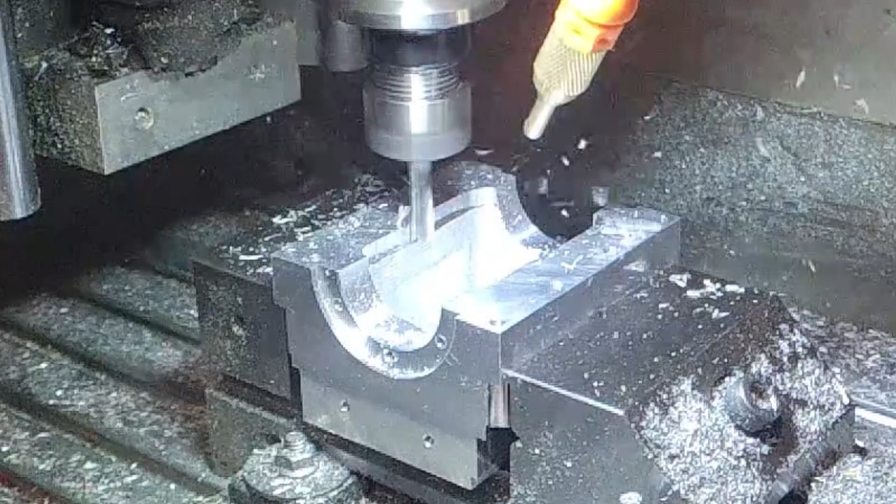Today we're going to work on the sump for our 30cc Wallaby engine. We're going to be looking at the Fusion360 files to machine the inside, the sides, and the bottom. We'll be reviewing topics we've touched on before, including loading an STL file that's representative of the rough stock that we've pre-machined on our mill.

We'll be modifying the CAD model to create keep-outs, so we don't machine areas that have been previously machined elsewhere, like the crankshaft bores we machined on our lathe. And finally, we'll delve into some of the operations, looking at tool feeds and speeds, depths of cut, tool loads, and things like that.

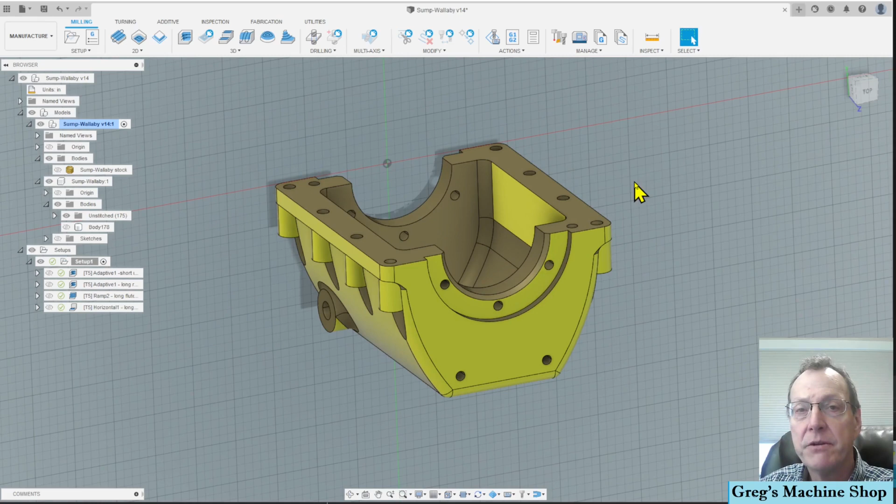So we created an IGES file out of our CAD program and imported it into Fusion360. That's this model here. Now, if you watched the last video on manual machining, we roughed out most of this material from the inside of the sump. This is an optional step, but something I like to do because I can remove the material much quicker on the manual mill with a drill bit than I can on the CNC machine. So let's take a look at that real quick.

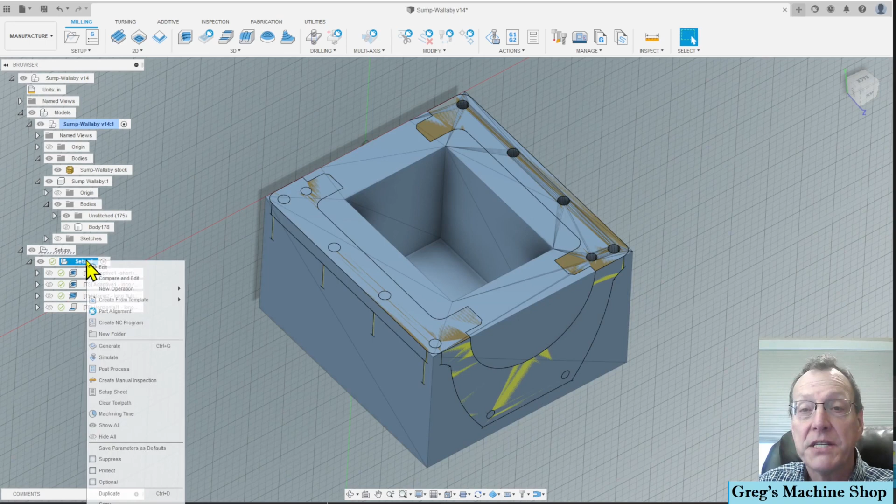Then we created a simple STL model that reflects the geometry created by roughing out that material on the manual mill. Right here. This was an STL file that was imported, and then down in our setup, you can see this area has been removed. In our setup, right click, hit edit, stock, we say from solid, we click the mesh, and we select this STL file. We've covered importing stock before in a video entitled Fusion360 using stock.

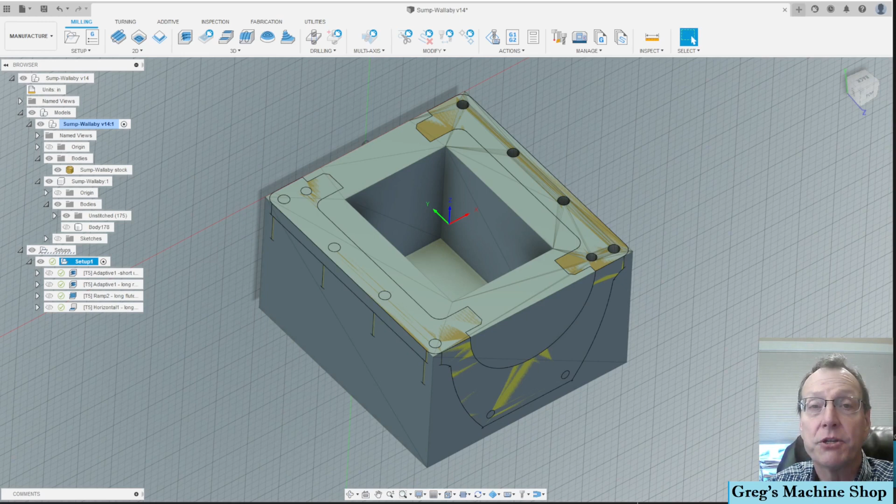Another thing I'd like to cover is how to mask part of the model that we don't want to machine. In our case, we've got these bores that were created on the lathe and the precision surfaces. We don't want the CNC machine to be machining in this area at all. We simply want to machine down and machine this cavity.

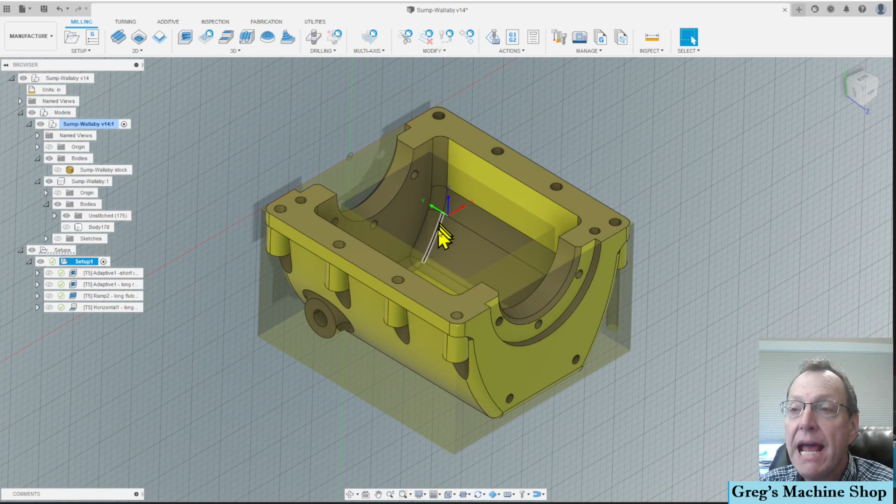One way to do this is to select areas within the model that we'd like to have machined. And we could do that. We could click all of these little areas, but there's no simple little box that we could click that would allow us to select just the area that we want machined. A much simpler method is simply masking those out in the model itself. We've explored different ways of doing that. The simplest, I think, is to just pop back into the design environment and create a sketch.

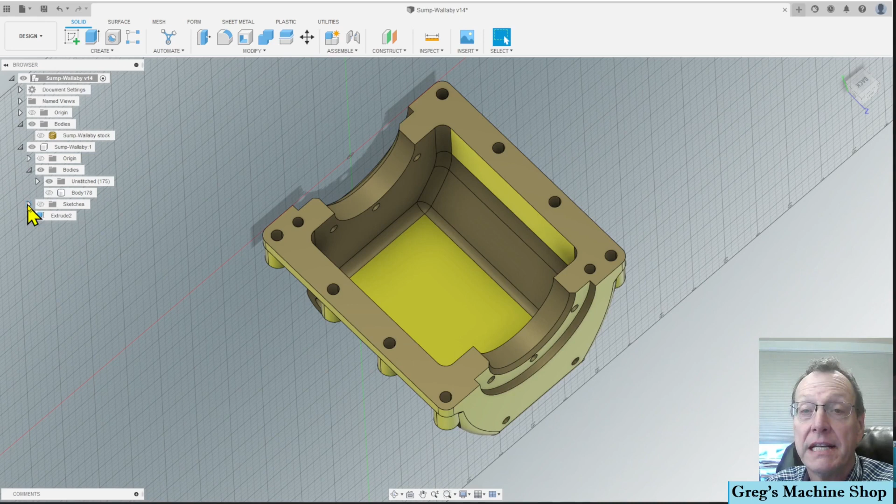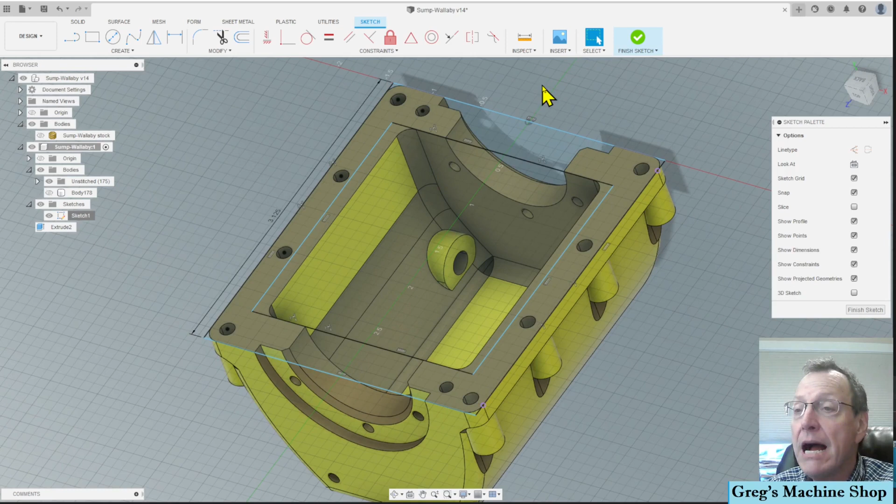Here's a sketch that I've created. Let's just pop in and edit this. It's simply two rectangles, one within the other, and they exclude the ends of the sump, which will allow me to machine just this area in the middle here.

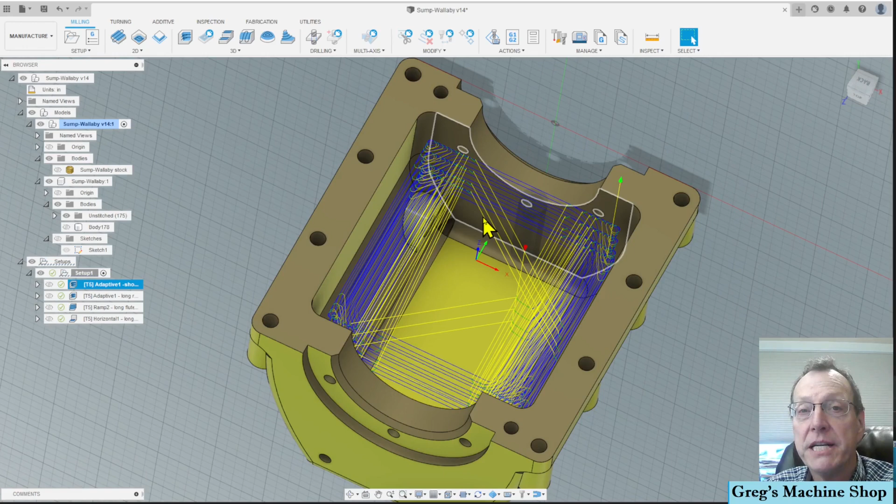Going back into the manufacturing environment, looking at our first machining operation, you can see these blue lines here represent the tool path. We've successfully masked out the ends of the sump, so that area is not machined. And then by using our STL stock, we're not machining out the middle, which has already been machined earlier on the manual mill.

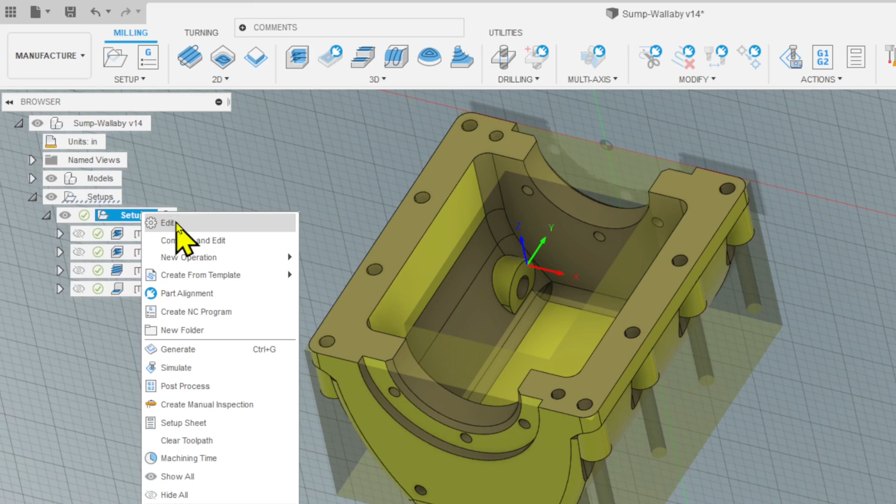Before we look at the operations, let's review the origin point. I've got mine set right in the middle of the part. This is easy for me to touch off on my machine by touching off the four sides and then zeroing to the center. The way we set our origin point is we right-click on Setup, click Edit. The first tab is Setup.

I've selected the Z and X axis. I'll come over the model for Z and I'll click a vertical edge. And then for the X axis, I'll click an edge that I want in the direction of my X axis. And then for box stock, I'll click the point that it presents to me right smack in the middle of the part.

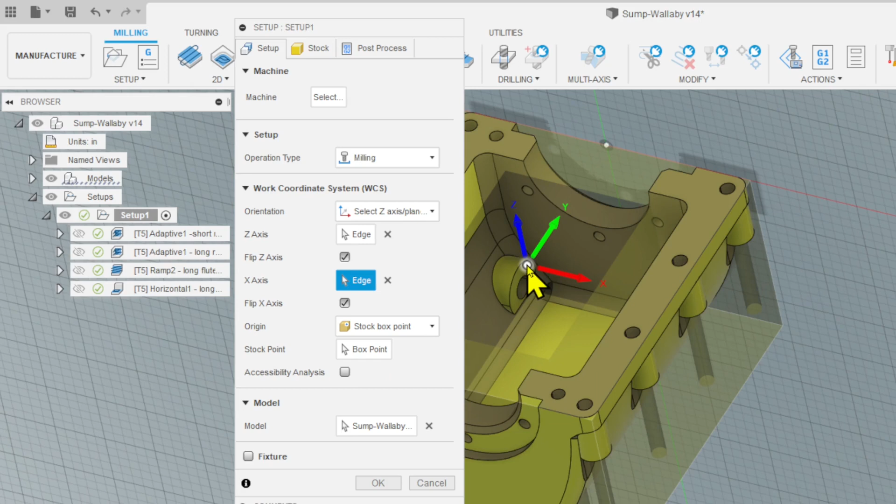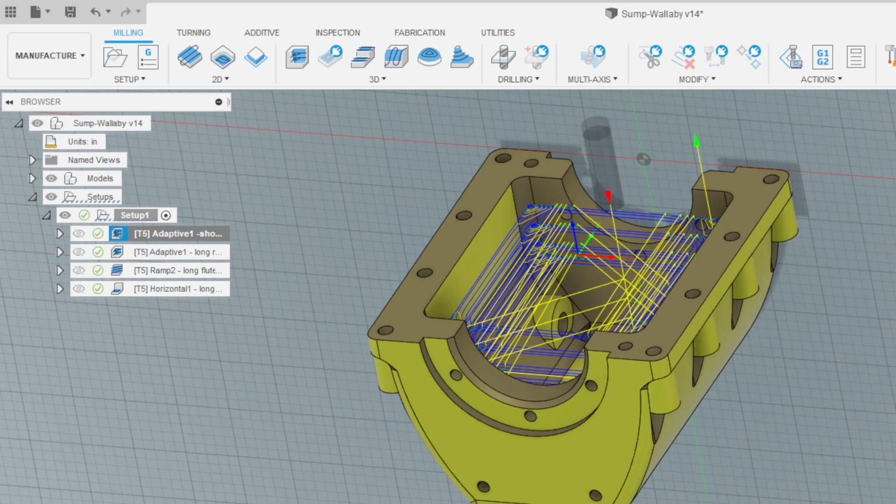So I've decided to use 4 different operations to machine the inside of my sump. My choices depend on the capability of my machine and the tools that I have on hand. The first 2 operations are done with a 1/4 inch flat end mill that only has a 3/4 of an inch flute. The first operation, right-clicking on it, opening up Edit, looking at the first tab, which is the tool, I'm running my spindle speed 8,000 RPM, and I'm running the cut feed rate at 12 inches a minute.

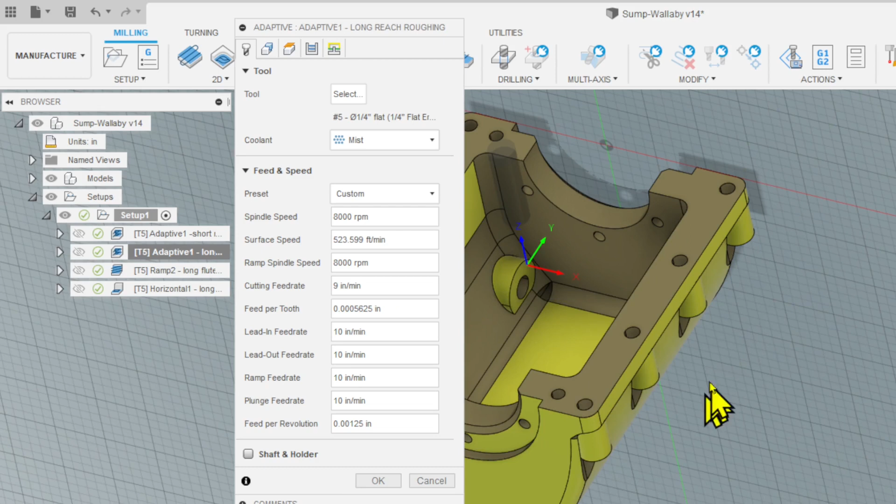However, in the second operation, I'm also running at 8,000 RPM, but I've slowed the cutting feed rate down to 9 inches per minute. This is because on the first operation, I have a 1-inch stick out on this end mill. On the second operation, I have to reach down into the pocket, so I go to a 1.5-inch stick out, and I slow the machining speed down.

I want to make it clear that these speeds and feeds that I've been using on my machine, the spindle speed and the feed rate of my machine, have been derived over a period of time of experimentation and understanding my machine. There's many factors that go into what will work best for you. So if you use any of my Fusion360 files, I would recommend slowing your machine down or substituting numbers that you know work for you. Just a caution for you.

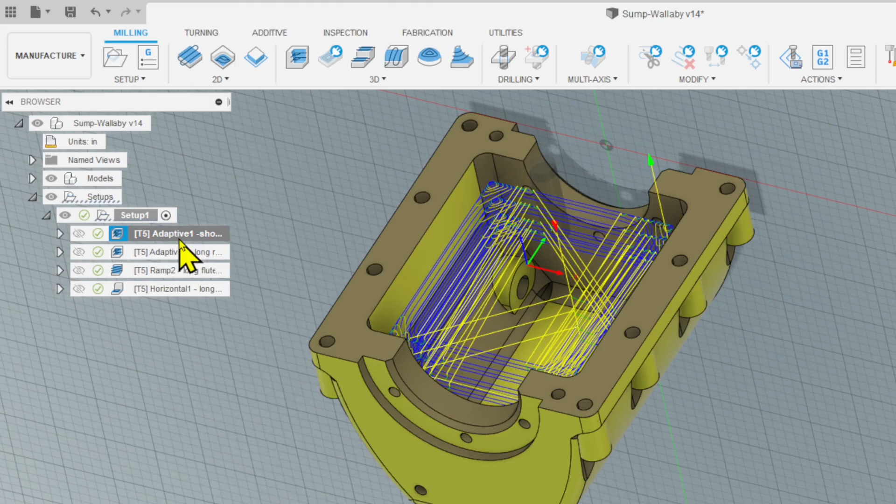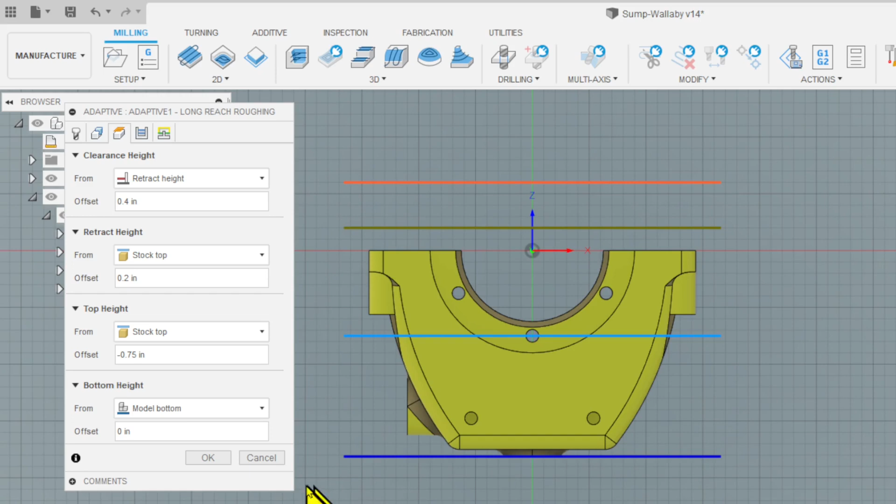Moving on to the other tabs. The second tab is used to select the area I want to machine. Here I've selected bounding box, which is the whole part. The third tab is used to select the depth. If we look at the side of the part, I start at the top and I drop down 0.75 inches. If we look at the second roughing operation, we can see that I start at -0.75 inches and then go all the way down to the bottom of the part. Next, we'll take a look at the passes tab.

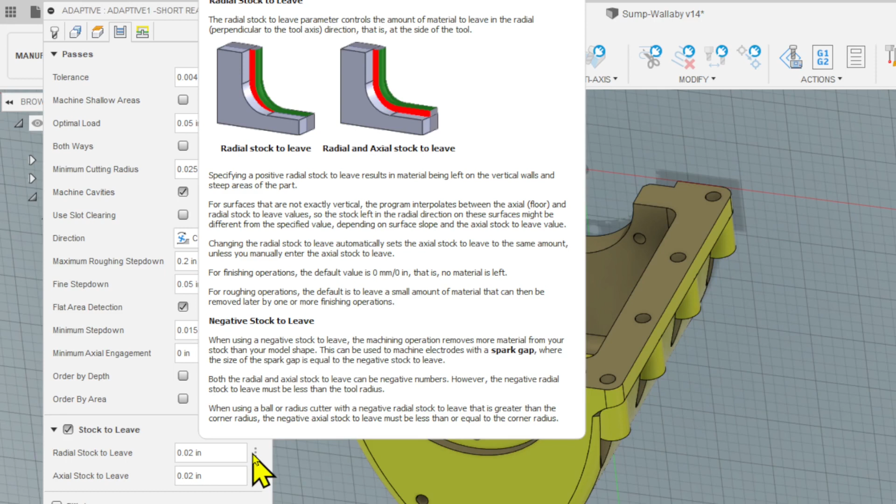When roughing, I like to use as much of the side of the tool as I can. In this case, I'm taking 2/10 of an inch step down, and I'm cutting into the material 50 thousandths. We could do that the other way around and step down 50 thousandths and cut 2/10 of an inch of material away, but we would be only using the bottom 50 thousandths of our tool on each pass. This way, we're using 2/10 of an inch of the tool, and we reduce the wear and increase the life of the tool. Finally, since it's a roughing pass, I'm leaving 20 thousandths of an inch of material both in the radial direction, which is the side of the tool, and in the axial direction, which is downward.

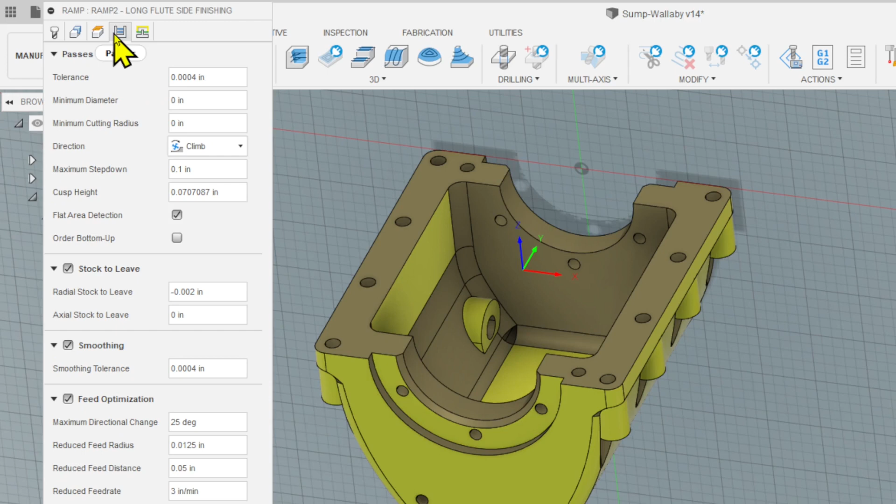For the finishing operation, I use a long flute end mill and a ramp operation, where I circle around working myself down into the part. I'm running the spindle at 8,000 RPM and a cutting feed rate of 12 inches per minute. And I'm only removing the 20 thousandths of an inch of material we left in our roughing pass. And I'm descending 1/10 of an inch on each pass.

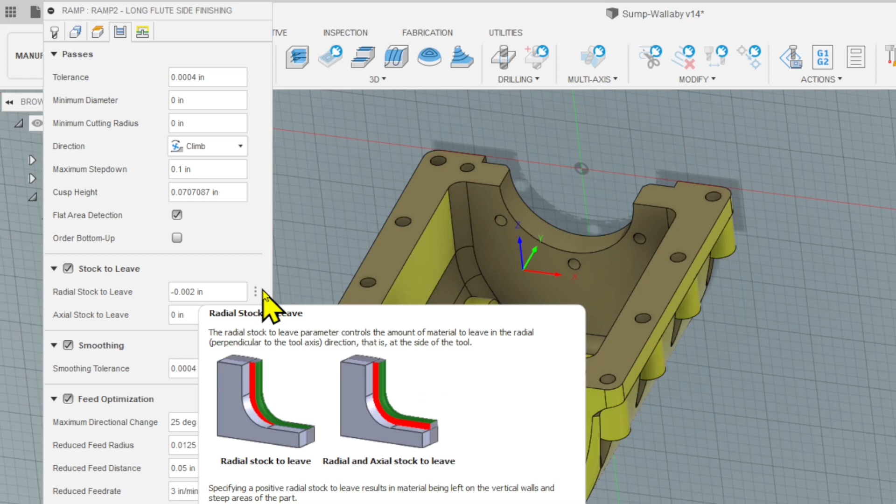You notice here that on my stock to leave, I say -2 thousandths of an inch. This is because on my machine with a climbing operation, the force of the tool is away from the workpiece. And I need to actually tell the machine to cut 2 thousandths of an inch more into the material to arrive at my proper dimension. And the final operation is a horizontal milling operation where we simply machine the flat area at the bottom of the sump.

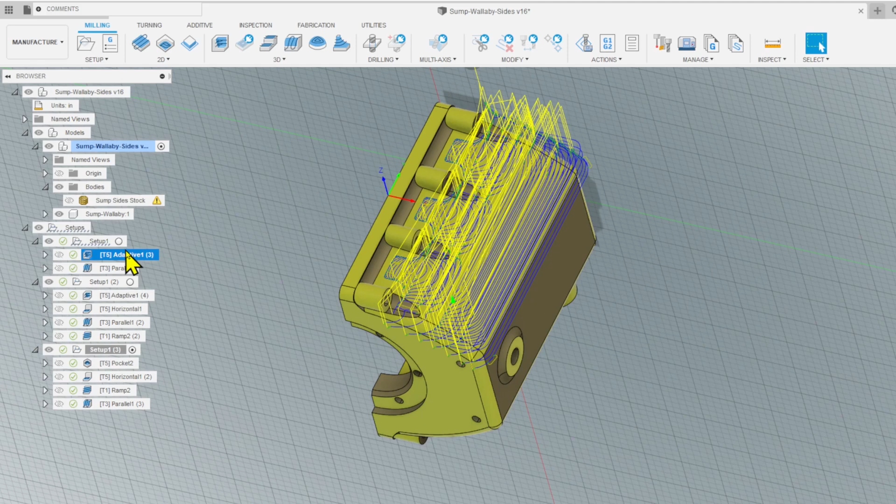Machining of the sides and bottom of the sump are continuations of the same themes we've been using before. In machining the side, we have an adaptive roughing operation, removing most of the material, leaving 20 thousandths of an inch axially and radially. And then a parallel operation using a ball-end mill, just moving up the side of the part, which will give us the curved appearance of the sump.

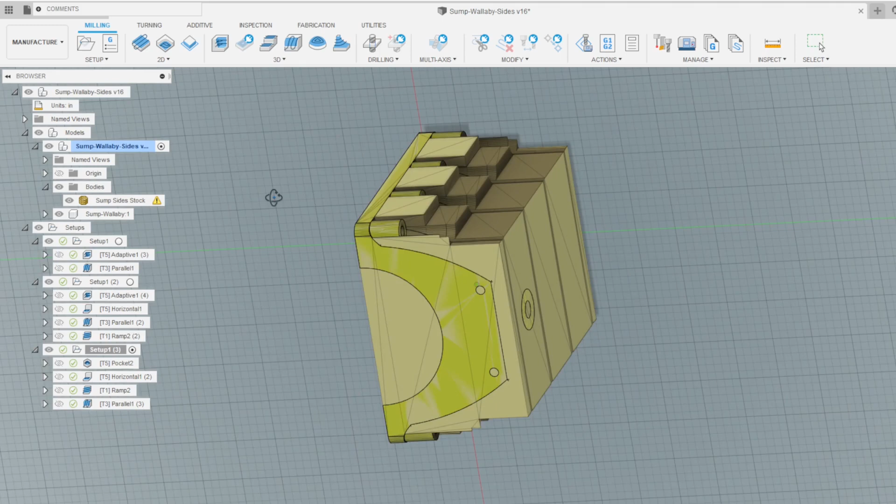We start with an STL file as our raw stock, which represents our starting point of our machining operation. The raw stock was machined earlier by taking 2 cuts on our manual mill, creating this step, and then a CNC operation creating the countersinks for our socket head cap screws to rest when we screwed our sump to the crankcase before we machine the crankshaft bore down the middle of the sump crankcase assembly.

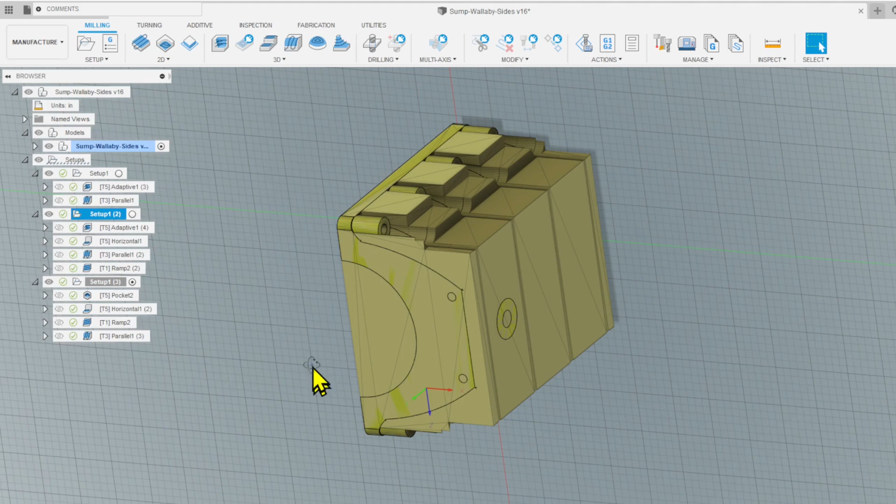Notice in this one file, we machine both sides and the bottom of the sump by having multiple setups. Here I've got a setup with the origin set in the middle edge of the sump, machining the right side of the part. I have another setup on the other side, again in the center top edge of the part. And finally, I have a setup machining the bottom centered right in the middle of the part. And we're able to simulate the machining of the whole part.

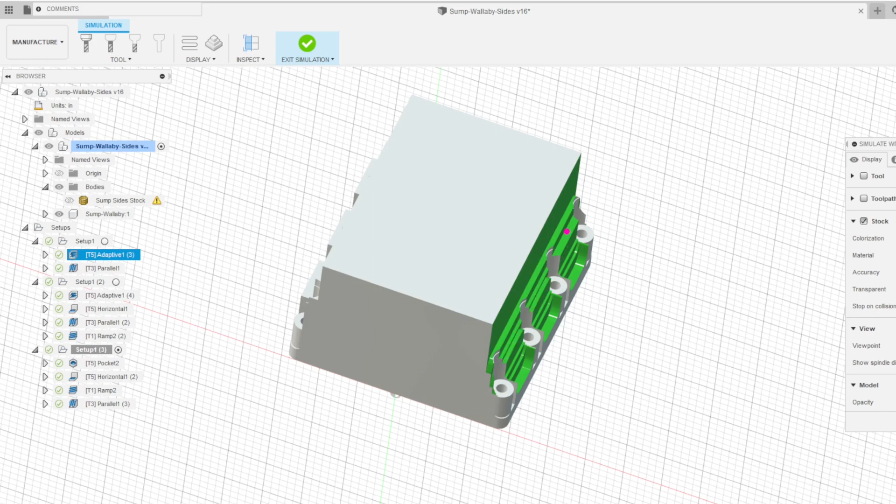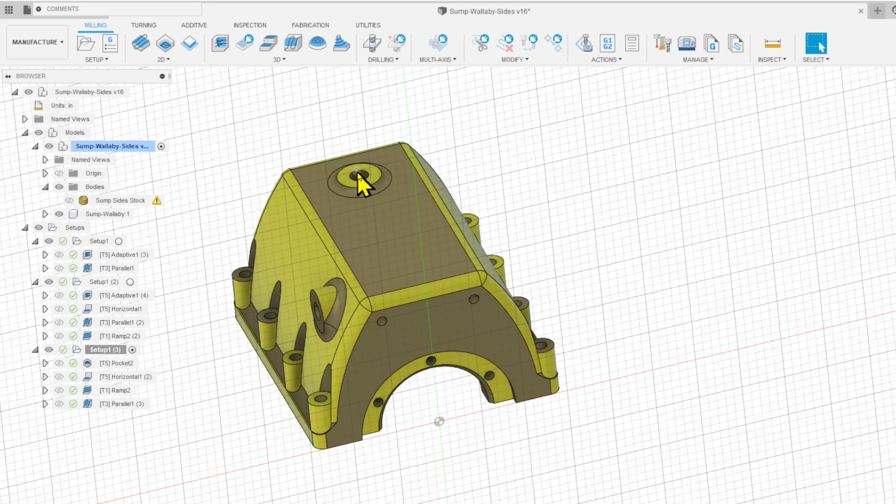One side, there's the other side, and there's the bottom. And there's our finished sump simulation. That's pretty cool. Looks like there's two operations we didn't discuss, and that's the machining of the two holes for the oil drain and the oil pickup. We use a 3/32 flat end mill and simply ramp down into the hole. We need to tap our oil drain and our oil pickup hole, and our sump is done.